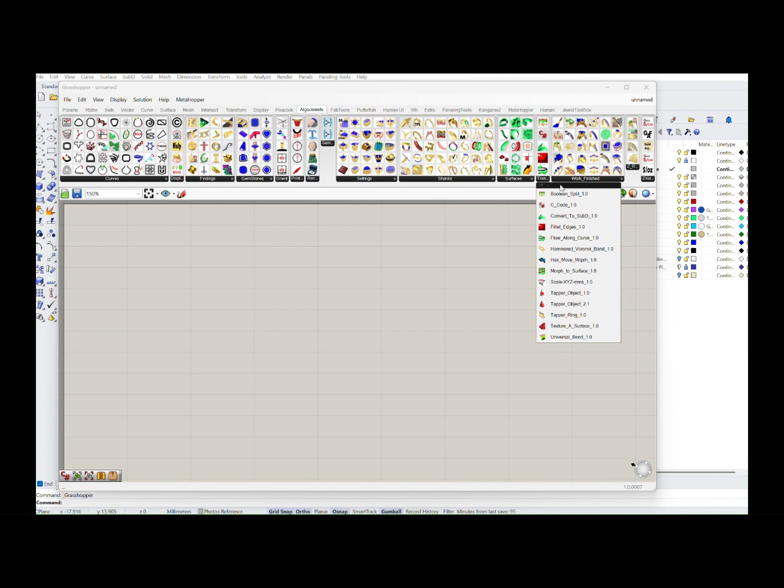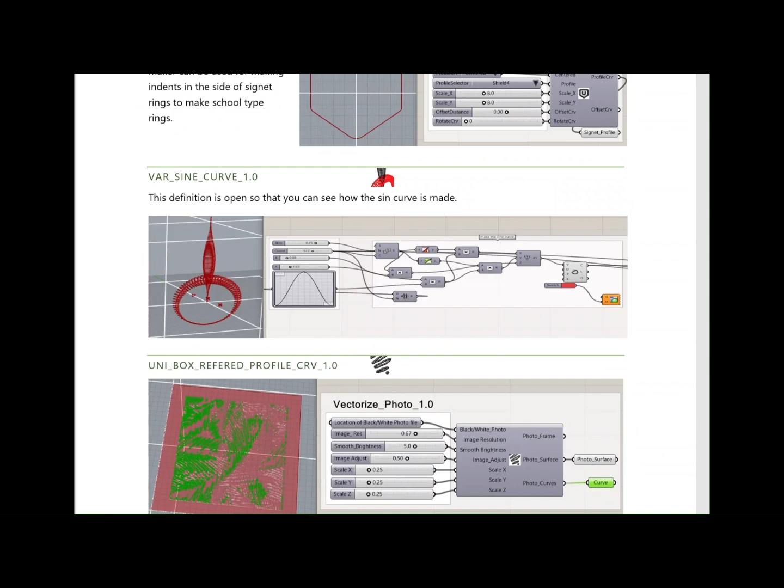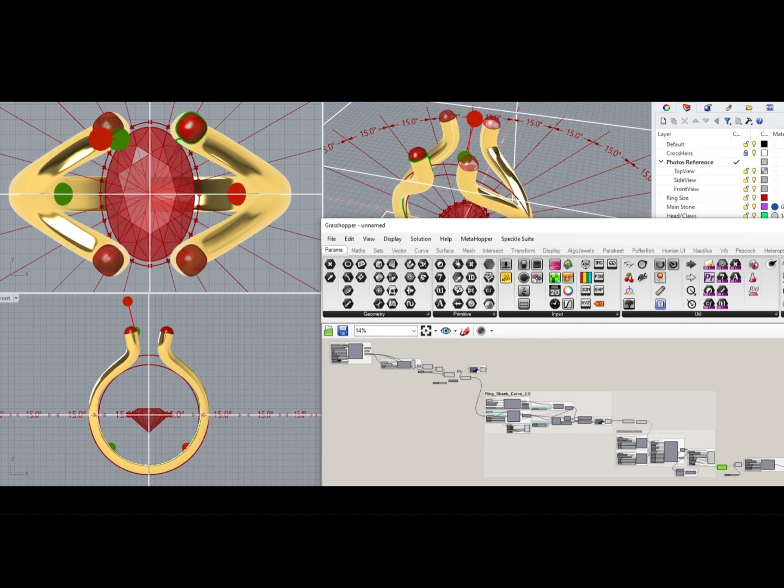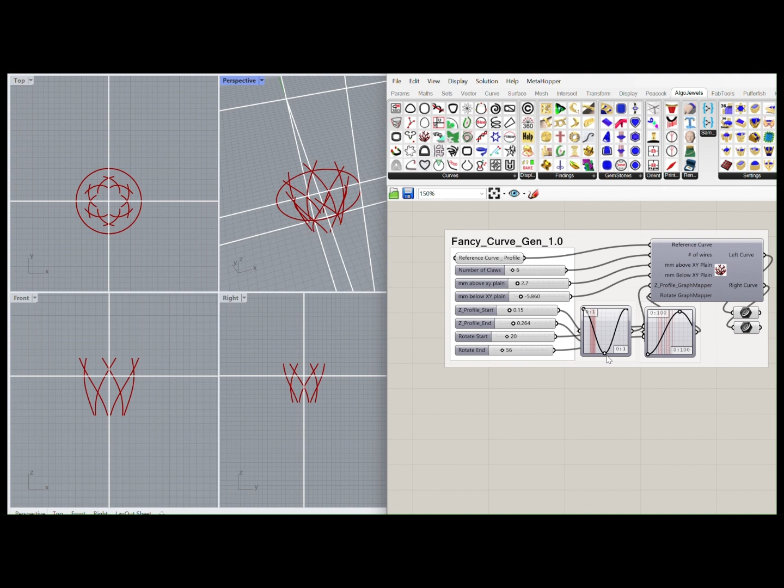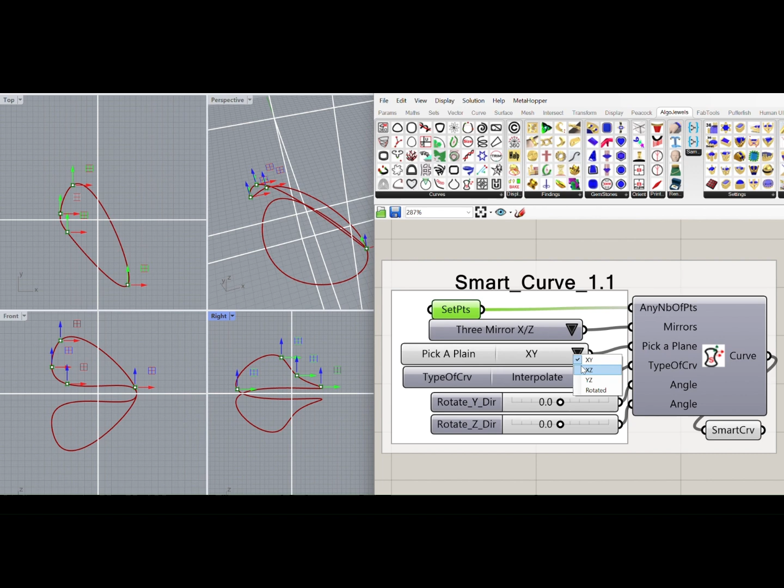The data flows, a list of points. A sphere is born at all the joints. I sculpt a setting, a filigree thread with logic and loops inside my head. The slider moves, the parameters change. The diamond's cut, I can rearrange. From a simple seed, a complex form, I weather the digital creative storm, and the AlgoJewels begin to shine. The code I type, a divine design. AJ components, a shimmering grace, crafting jewels in this virtual space. A diamond ring with a perfect stone, and earrings curve a shape unknown. From the abstract map, a physical plea, the magic of AJ for all to see.

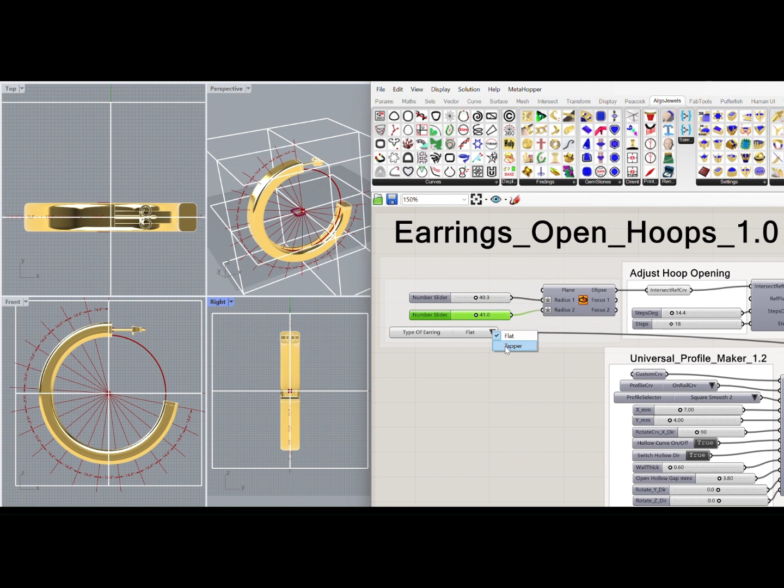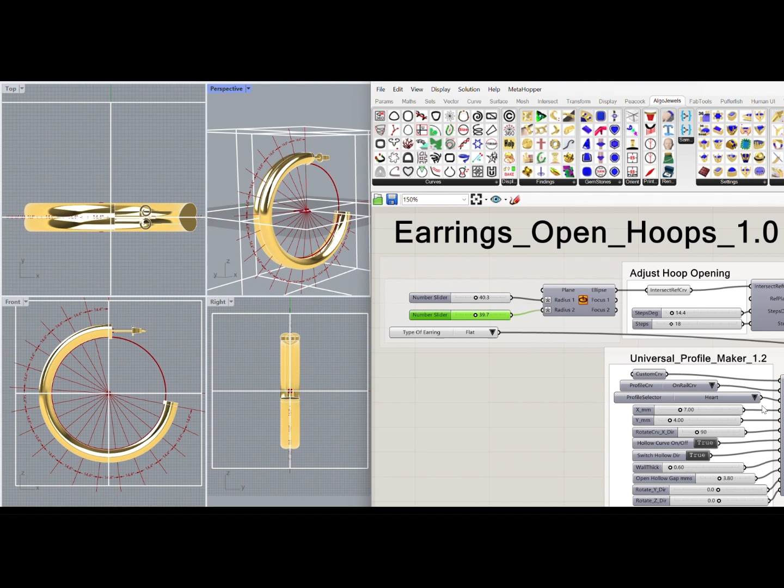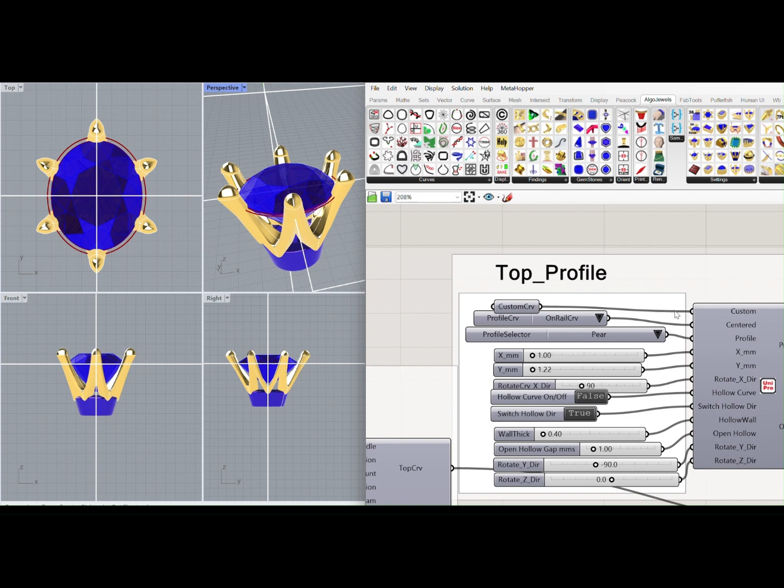They say a jeweler works with hands so fine, but in this screen, the true artistry is mine. The code is the hammer, the keyboard, the file. Every single line is worth the while. No dust or gold, just pixels and light, but the final piece will be burning bright. And the AlgoJewels begin to shine. From the code I type, a divine design. AJ components, a shimmering grace, crafting jewels in this virtual space. A diamond ring with the perfect stone, and earrings curve a shape unknown. From the abstract map, a physical plea, the magic of AJ for all to see. Yeah, yeah, the magic of AJ for all to see.

A digital jewel for eternity. A diamond ring, an elegant twist from Grasshopper's heart. A golden kiss.

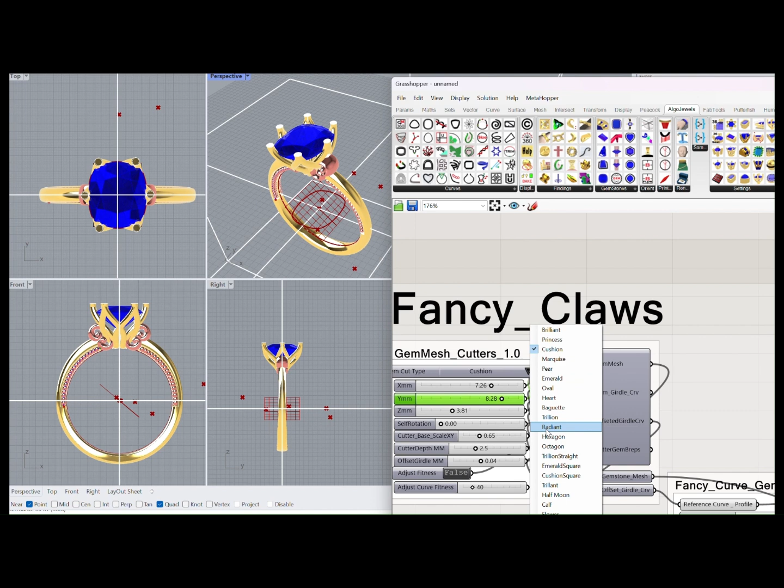In Rhino, you would start by selecting standard, open Grasshopper to launch the Grasshopper tool. Grasshopper will load. It will also load all your AJ components. At the present time, October 18th, 2025, there are 350 components that can be used in AJ to create algorithmic jewelry.

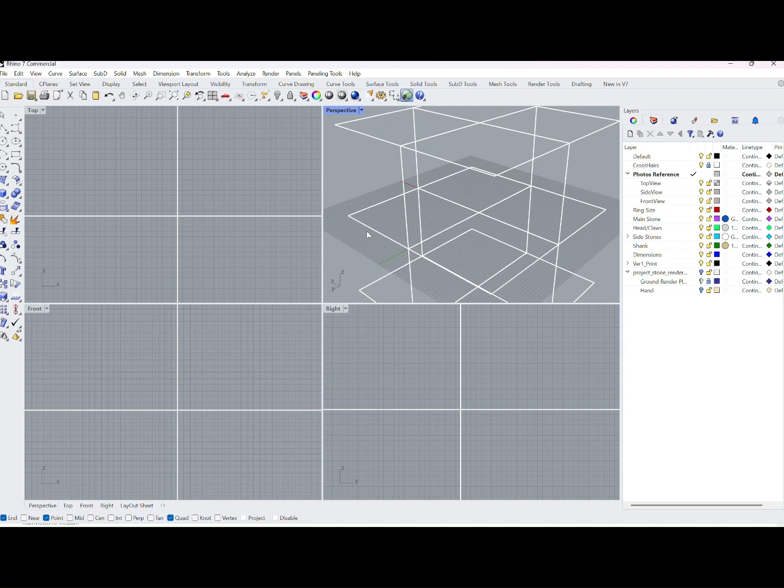Here we see Grasshopper loading the components. It opens up. You'll see Grasshopper and parametrics: maths, sets, vectors, curves, surfaces, meshes, intersections, transform, display. AlgoJewels shows up right here in my folder because I use it the most. It consists of...

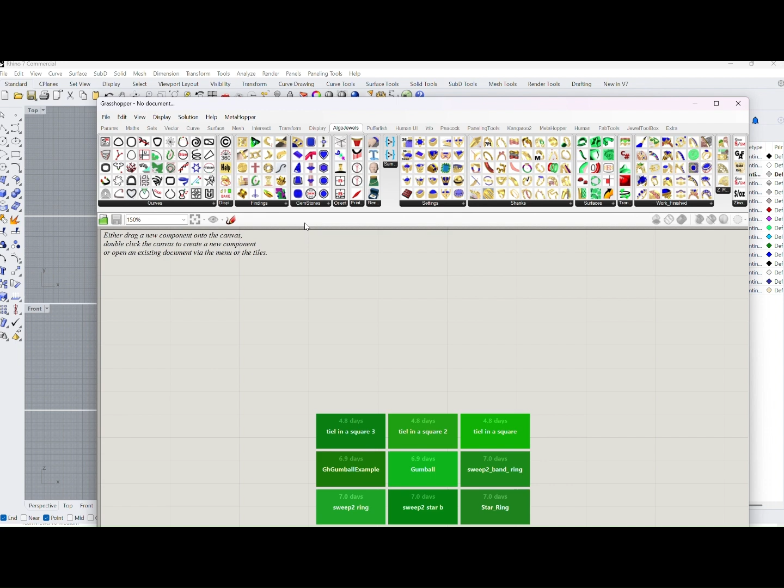Approximately 350 components. We start with curves, right? In the curve section, there are a list of different types of curves because most in Rhino, you're creating a surface or a poly surface or a B-rep, which is watertight. And everything in Rhino and Grasshopper starts from a point and a curve. So we start with curves on the left-hand side.

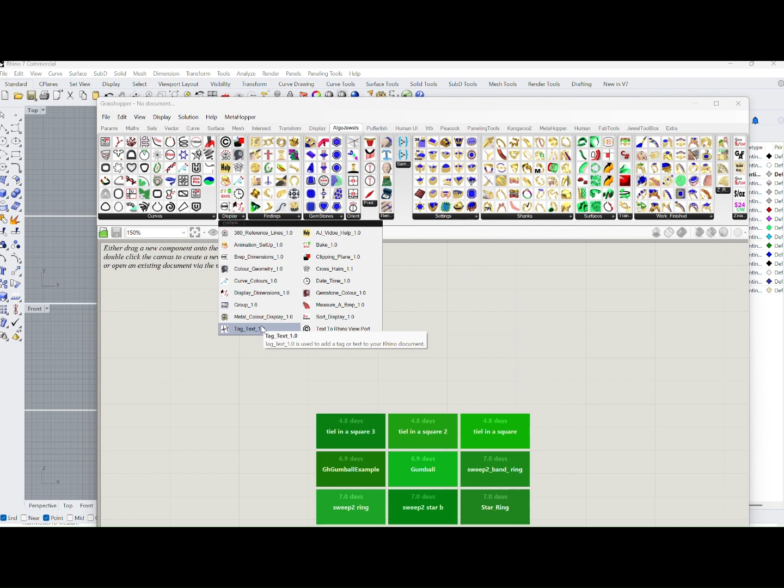Next, you'll have display where you can use reference lines. We're going to go through each one of these in the course and show you exactly what they do in individual components that will link back to the training manual. You'll see different findings like crosses, earring posts, how to make a hinge, horseshoe, a flower component, gemstones, all different types of gemstones, pave setting gemstones, circle packing, round brilliant to curve on a subsurface, gems to mesh.

Gem mesh cutter one is the most common used to create a gemstone. Then you'll find orient, what you need to do. Everything in Grasshopper and Rhino is oriented over 0, 0, 0. And then from that point, we create it and move it to different locations in space.

We have printing and casting items, how to cast. We have rendering tools: an arm, earring base, head, necklace, ring box, and ring finger. There are different types of settings: crown settings, curves, claws, spine curve, halo, and different types of shanks.

When you add a setting and a shank together, you can end up with finished work, like bypass rings. These are finished settings, but once in shanks, you have different types of shanks you can make. The most common one you'll find is the Ryan shank, which is a beautiful shank. I use it all the time.

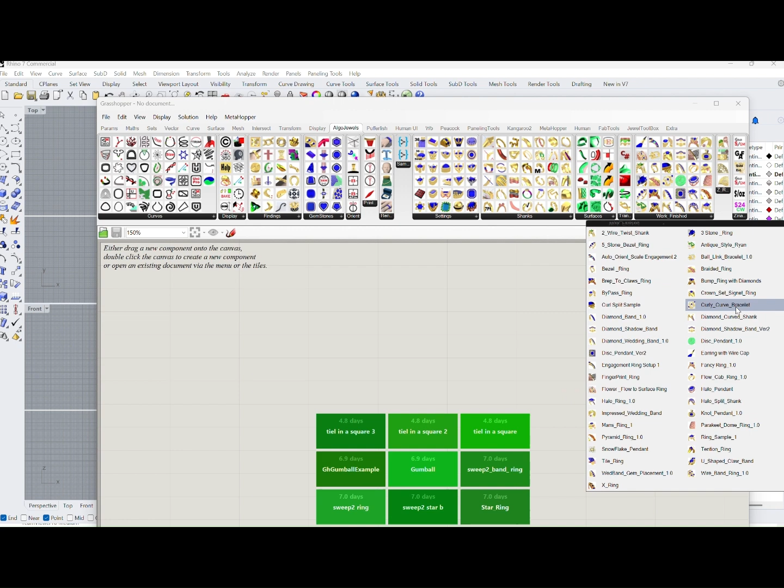A fingerprint ring. These are different examples that allow you to look at the piece of jewelry that you created and put it here. In the end, what you want to do is figure out the weight of the object and how much it costs. We have weight estimators and different Kitco metal finders, where the object will go to the Kitco website and download the daily rate at that time, etc.

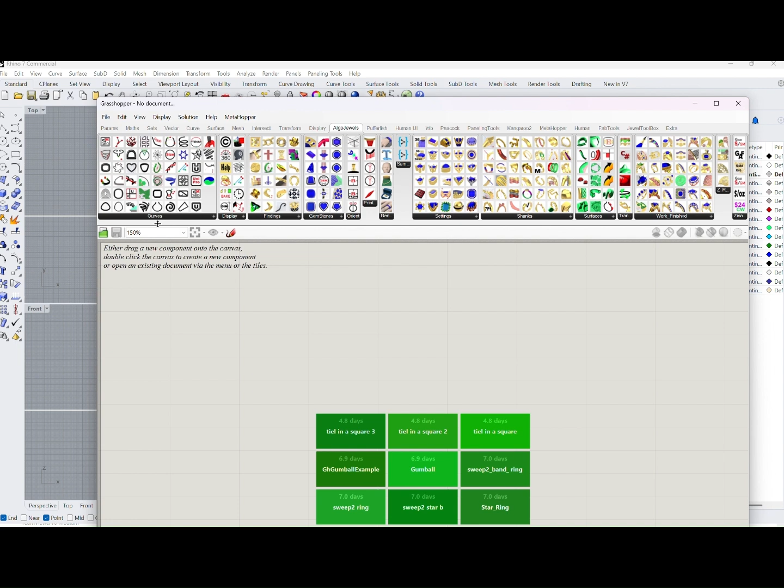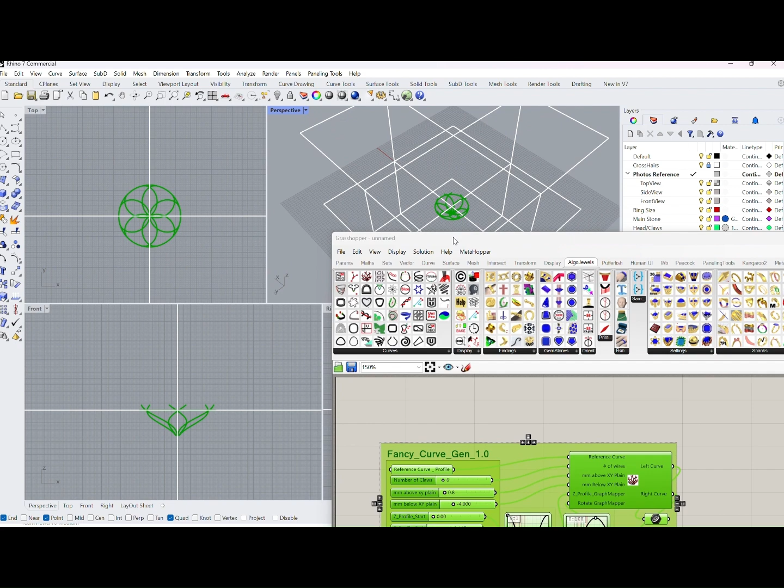So this is the AlgoJewels components. They're useful, and we're going to show you individual pieces from here on in. Here's a fancy curve generator. You touch it, bring it to the screen, see the component, and there you have the finished component. Now each component has different sliders on it.

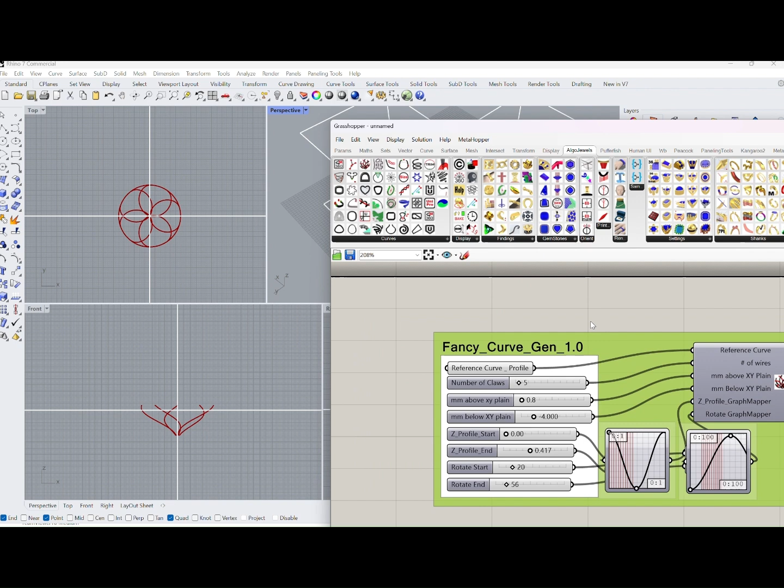It has an input section. It also has a reference curve profile, so you can change this. Right now we have a circle as the reference, but imagine if you take a gemstone. Let's do that quickly—we'll take a gemstone here and add this in. There's the gemstone, let's go 6 by 6, and we take the girdle curve and input the girdle curve in here.

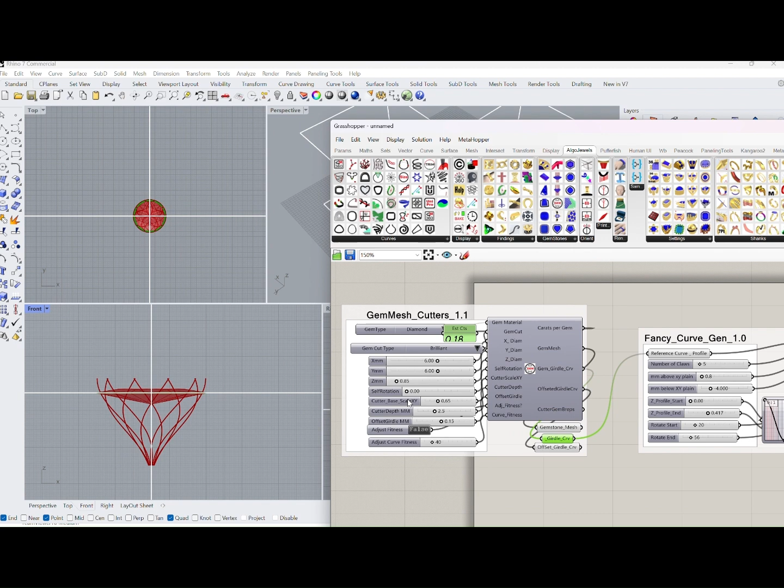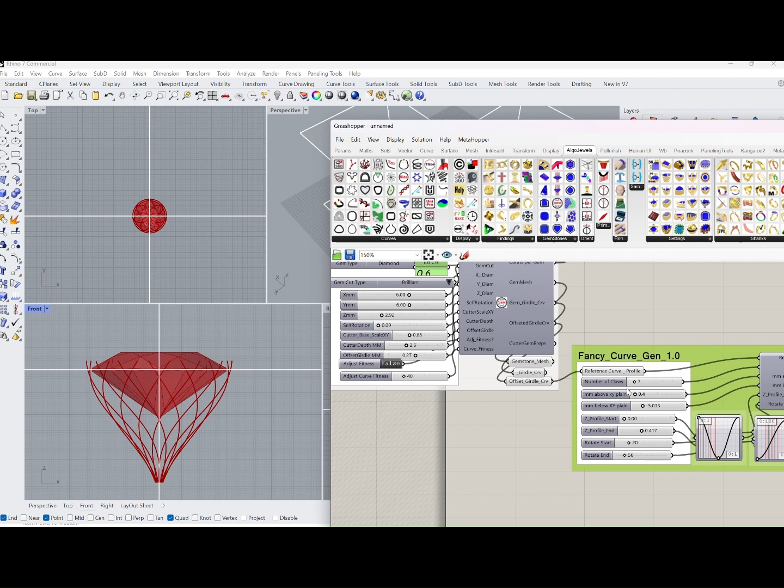Now you can see how this tool can be used to create beautiful different claws. We can use the offset curve, and we can offset it, and now we can create different curves. Notice when I change the gemstone, the curves also change to the reference curve.

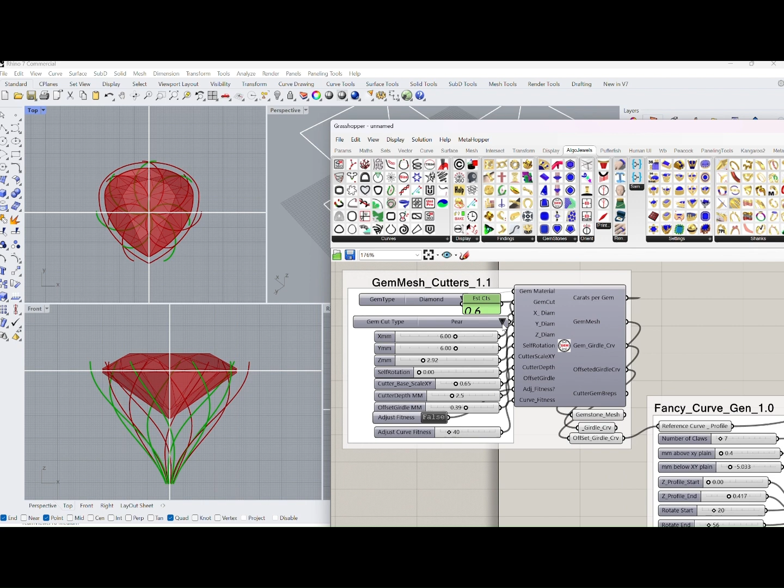That's outputted. So just imagine you can use this tool to create fancy claws. Let's take it the next step and make fancy claws. We would add a tool—where is it in here?

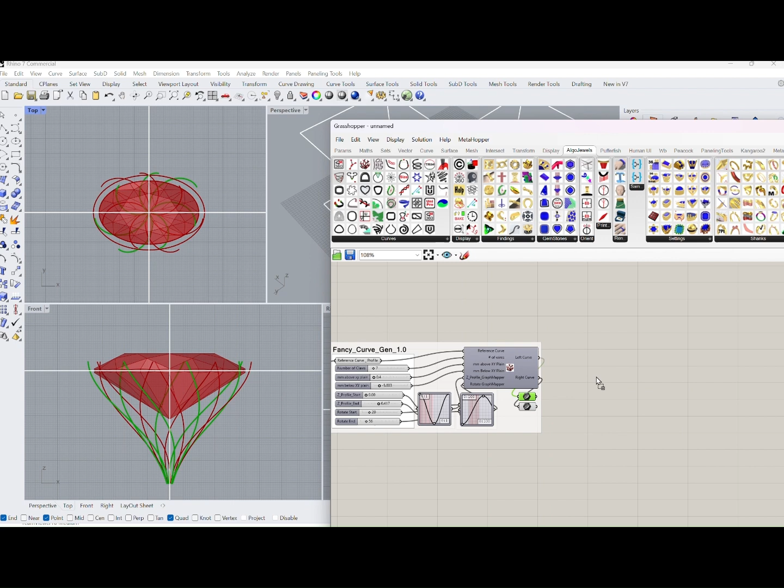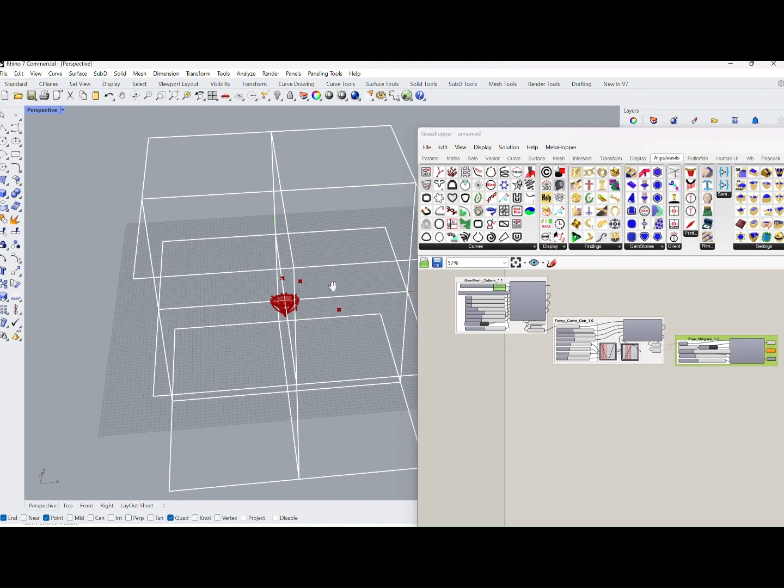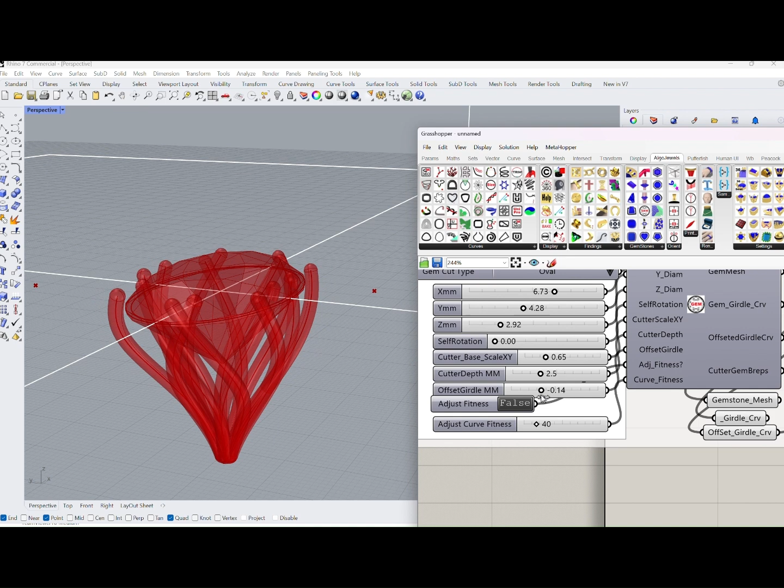Pipe milgrain. Add it. We're going to bring the left curve in and the right curve in, and we're going to set it to curves. And here you go, your first fancy claws. Let's adjust it a little closer to the gemstone. Okay, we're going to go like this.

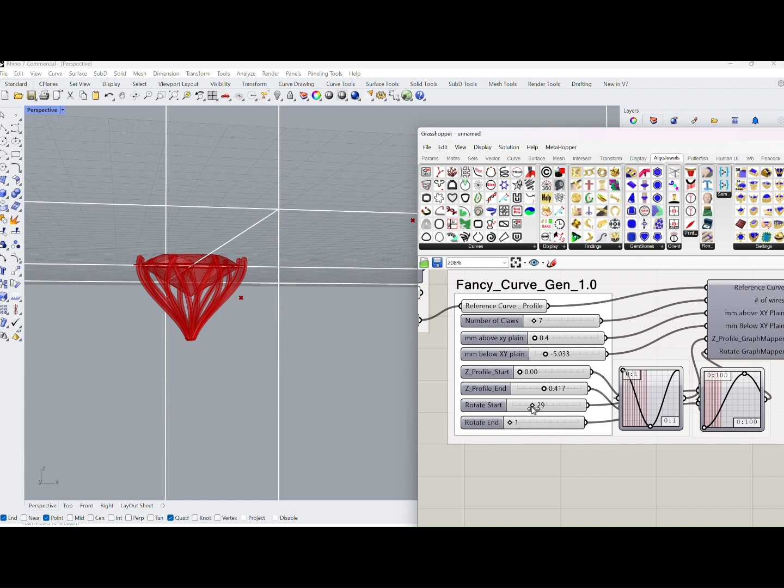You can rotate it from the bottom. You can rotate it from the top. Okay, reference curve, number of claws.

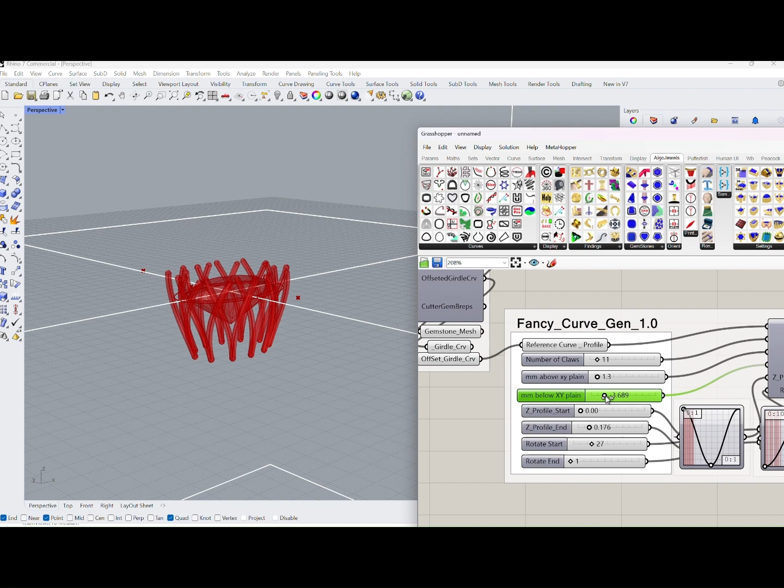So you can see the different potential this one curve, related to a gemstone, can do. A bit of tweaking and you can get whatever arrangement of curves you want—round, brilliant.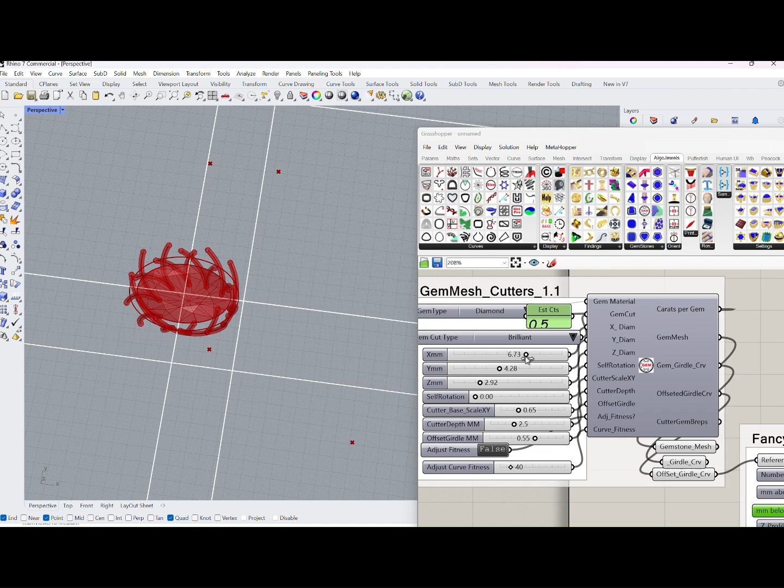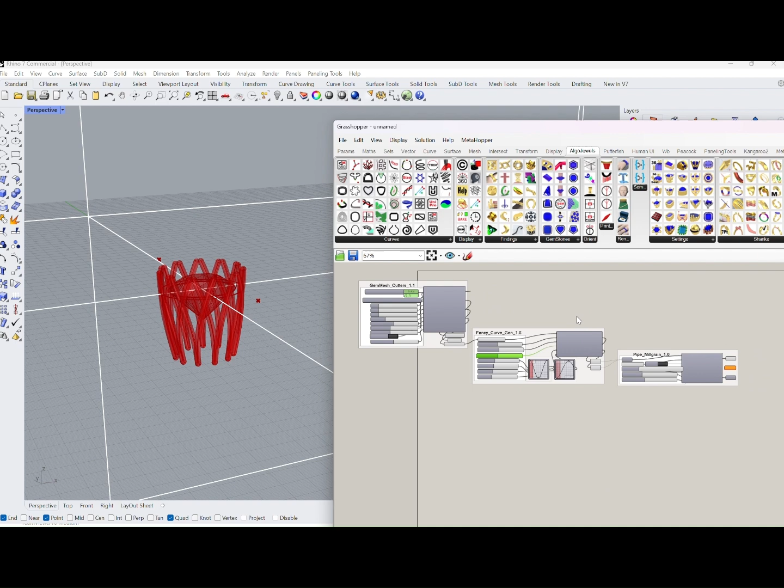All the AlgoJewels tools will usually go from left hand to right hand, very similar to just writing your own Grasshopper code. But the beauty of this is you can play with it and create all kinds of different arrangements.